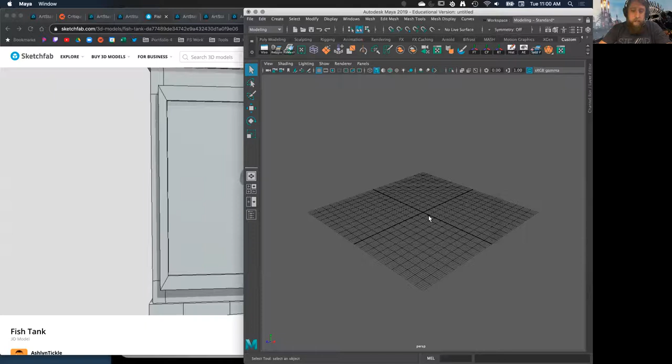You guys can easily make some really cool looking crown molding stuff. Actually, you know what? No, I don't think I have any deformers that do that specifically.

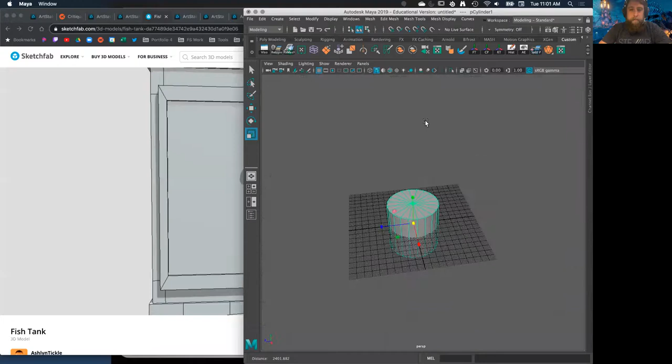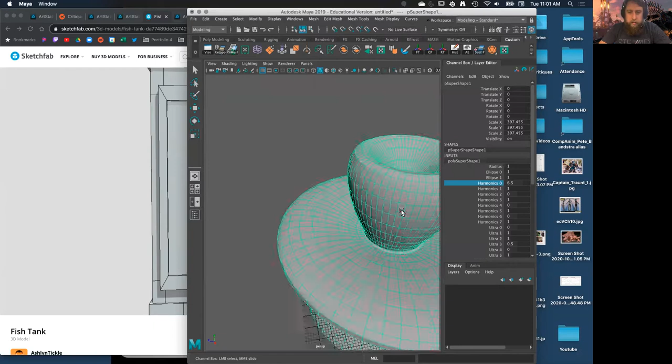Hold on, I wonder if I can make some cool shapes for you guys. I feel like harmonics might be able to do it. If I do harmonics and do some weird stuff here... no, this is too much though, it's too edgy.

Where's my divisions? Here we go. You bring the vertical divisions down. Yeah, sorry, that's just some weird stuff.

If you guys want to know how to do a fountain, then I just showed you how to do it right there.

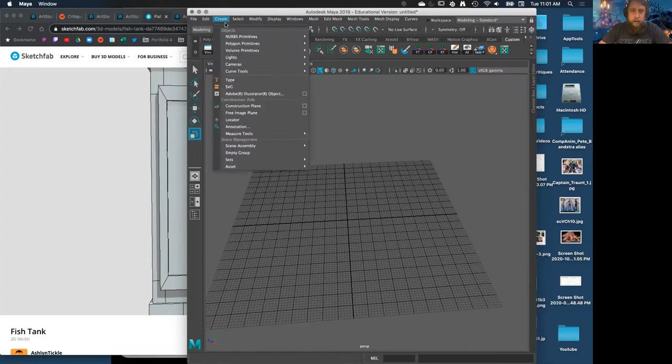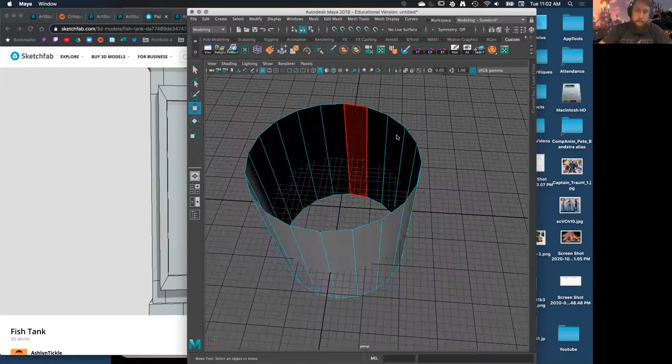But what I was showing earlier here was taking a cylinder, and here's what I want to express to you, is a way that you can do this. I'm gonna detach. I wish that was just an option, just to give me an empty pipe with nothing in it. That would be nice, because I do use curves quite a lot in my modeling, especially when I have some complicated shapes here.

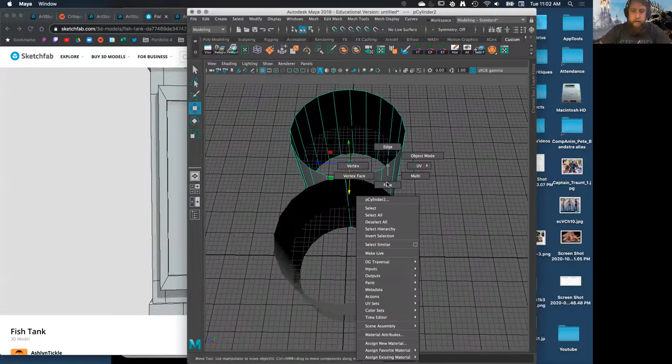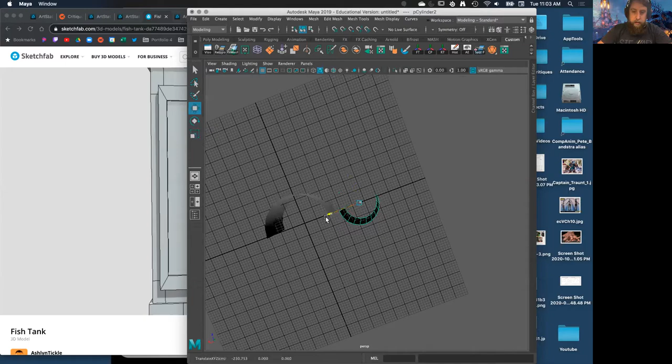But we can take shapes like this and do some curvy stuff here. Maybe you wanted like a nice S shape kind of thing going on here. Maybe this one is lighter, and doing something like that there. Okay, line that shape up.

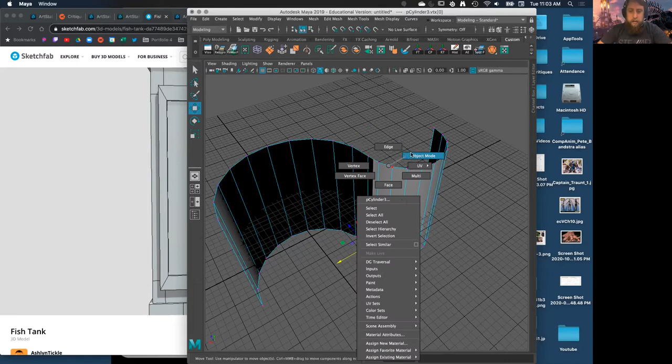I'm just trying to do a simple crown molding for you guys. Hold tight here, I'm gonna combine these shapes together. Let's merge some vertices together, merge it to center. Now the model doesn't know what the heck to do with it, so I'm gonna hit conform. There we go, so that's the edge that I'm using here.

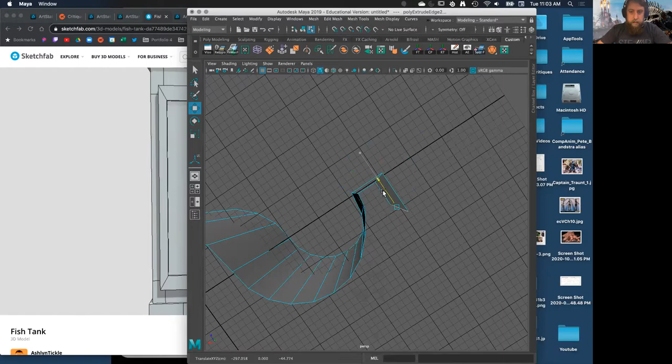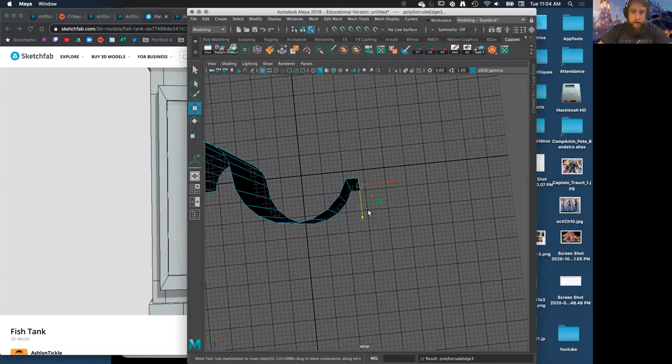I'm gonna take this shape and just kind of extrude it up, and probably extrude it this way, like that. And you know what, maybe I'll take this shape and bring it down like this, and I don't know, do some interesting designs with it. I'll extrude it again, let's get a little bit of a bottom here.

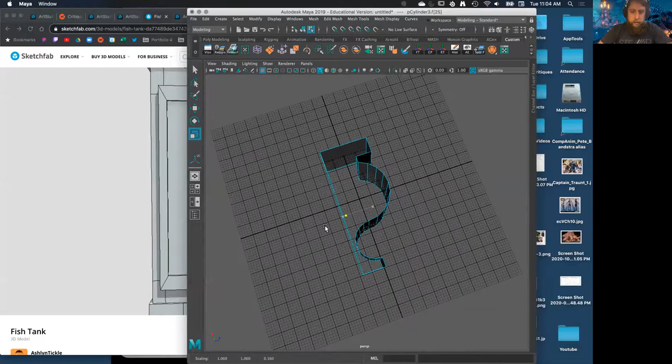If you want to find reference for what exactly you're trying to do here. Okay, so this is the shape that I'm making here. It's a really simple kind of molding shape that I can now extrude this up, and we can get some interesting designs on the side of those doors.

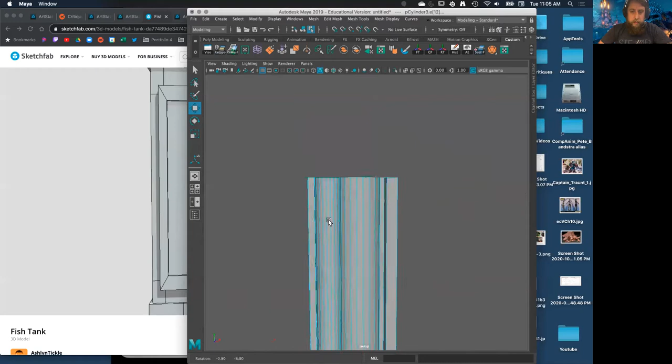Man, I really wish I'd be able to... you know what, here, we're gonna do some 45-degree cuts on this thing too, so that we get actual door shapes. Let me make this thing thinner too, this is actually really huge as well, so hold tight. Okay, scale down, I'm gonna come over here like this. If I want a 45-degree on something, it's hard for me to draw that out by hand.

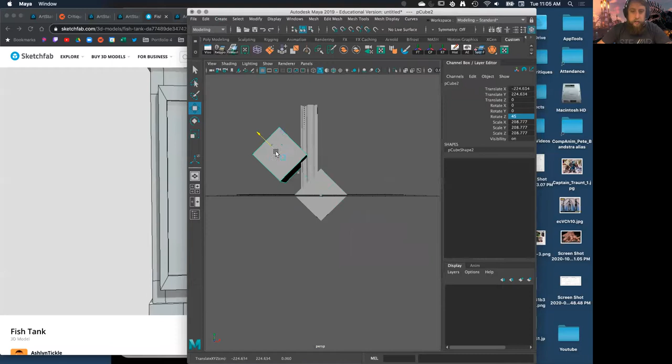So what I'm gonna do here is grab a cube, I'm gonna scale it, and grab the shape here and just make it 45. I'm gonna duplicate one up here like this, and the other one I want doing this right here.

And you might say to yourself, oh Harvey, you're gonna do a Boolean, really, right in a lecture? No, I'm not gonna do a Boolean, I'm gonna do a multi-cut here. Nope, wrong view, there we go, perfect. I'm gonna do a multi-cut on this shape with these other shapes as a reference, that way I could just go point to point.

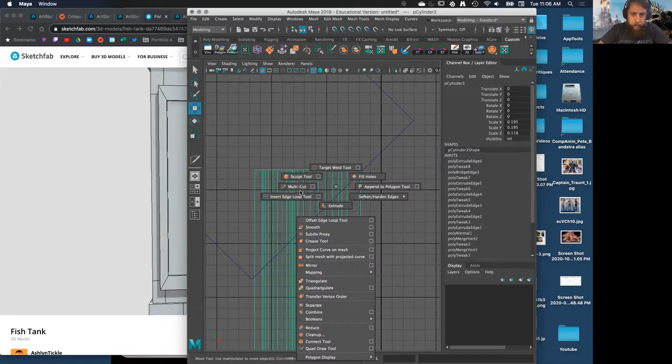Okay, sorry, I'm not in object mode anymore. Object mode, Multi-Cut, point to point. Okay, so it made a line there. You could check it out. Let me just try to hit that vertice head on right there.

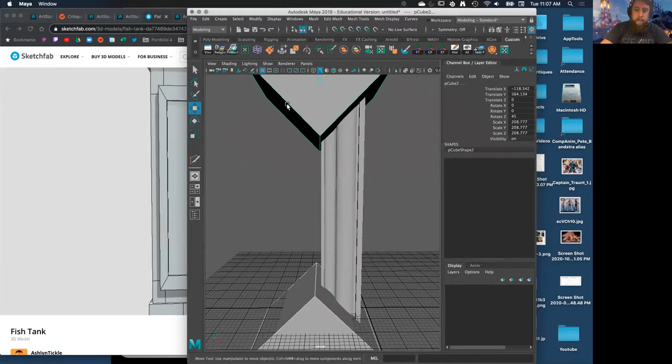All right, so I have some lines here now. Let me just delete these guys, I don't need them anymore. Got some lines here that I can actually detach. This is like a ninja slice tool that you guys can definitely use now.

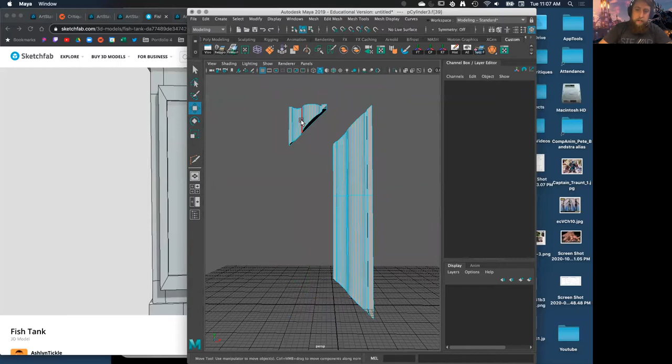Chop those ends off there. I don't know, I mean you can fill this in. You know, this is kind of a messy shape, so I'm just gonna triangulate it. We're really not gonna see this stuff.

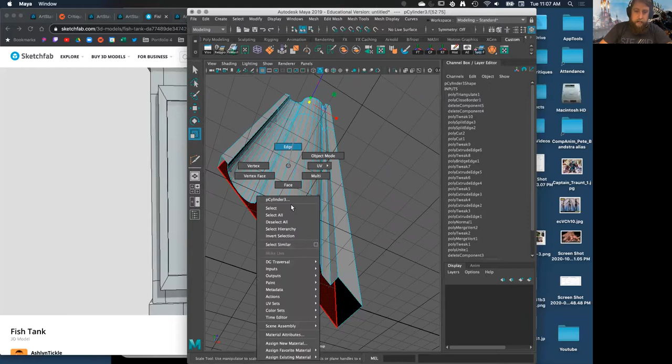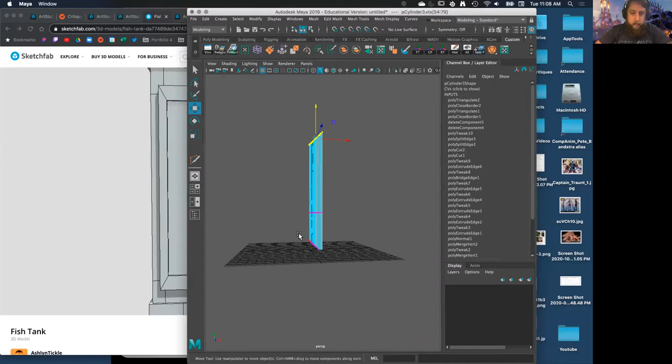But I mean, again, like you've seen me model, I don't like to... I like to make shapes separate so that they can create creases and stuff. So if I was modeling this door now, I would be doing something like this where I would pull these guys out like this, duplicate it. Let me just center the pivot here too.

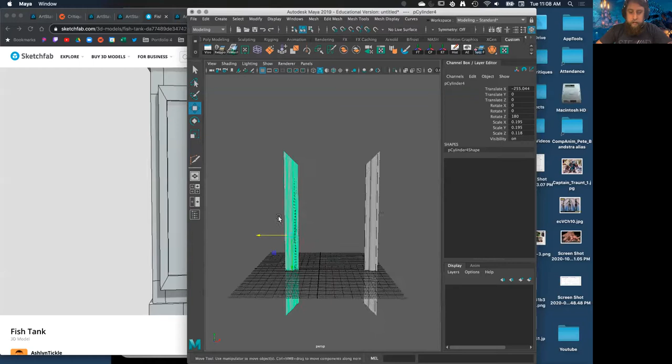We'll flip this guy around 180. Well, think about it. There we go. 180 flip. Okay, and I'm sure you know what I'm gonna do next, right? You know, I just take this guy to a little 90-degree turn here.

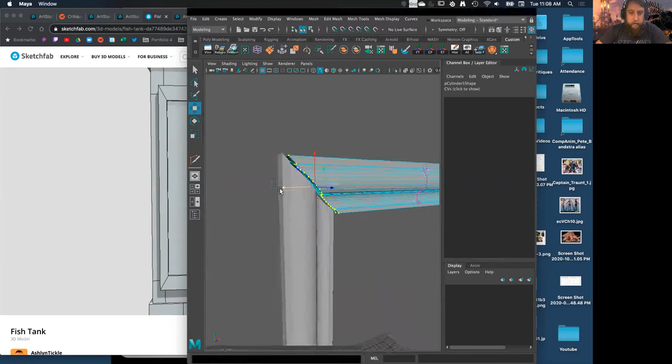Trying to line my stuff up here. Bring it on over, try to get it to line up the best that you can. So now that I'm looking at it, it's just like, okay, well let's raise it up a little bit more and then pull it over here. That's good, we're lined up now. Looking good.

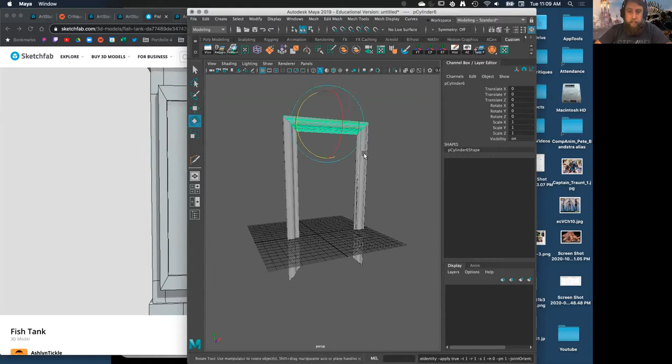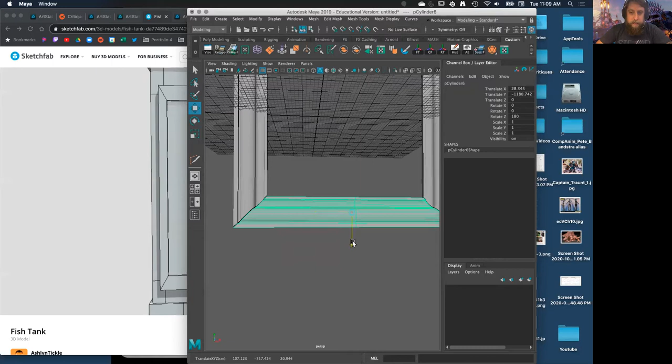Shift duplicate, I'll freeze my transform. Just because there's a lot of transforms going on in this thing, I'm just gonna do a 180 here. Okay, my center is obviously not pivoted still, so my pivot is not centered. Sorry, my center is not pivoted.

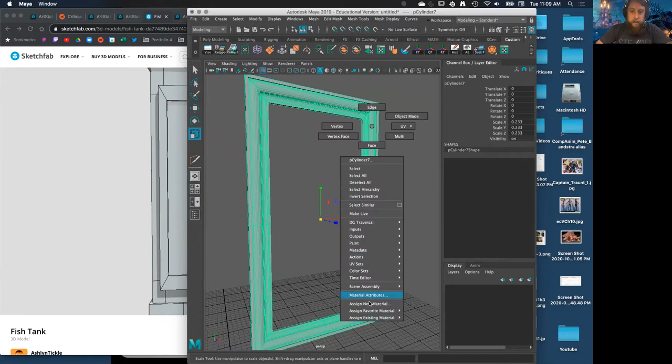All right, and now you got a nice, good-looking crown molding that has some stuff going on with it. Now let me combine this together, and we'll scale this in. We'll delete some history. Let's put a Blinn on this just so we can see it, right? That's all I want from this. I need to soften this stuff out.

No, actually I can't soften because I need some bevels in here. This stuff's not going to soften very well. Here, actually, let me just grab some edges in the middle without grabbing these end piece edges, and I'll soften that out. Okay, but here's the look there. All right.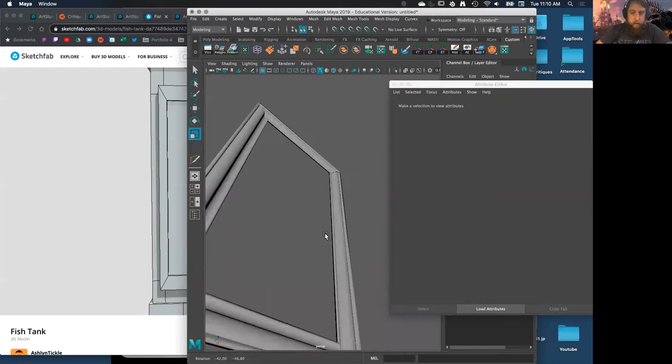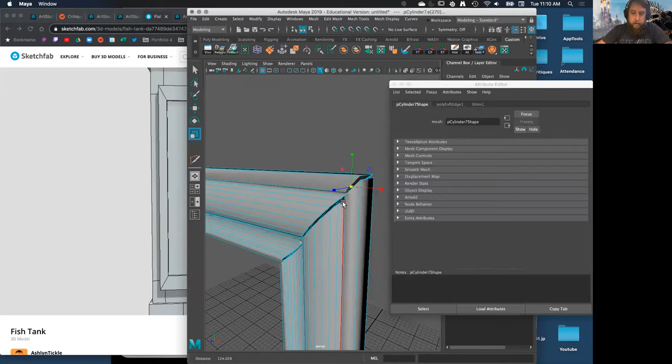Much nicer, you know, it has some appeal to it. That's the way I want you guys thinking about shapes. Try to brainstorm and figure out how am I going to make this stuff look good, how am I going to make these creases really look good. You definitely want some bevels on these guys probably. I need to do that before I triangulate it, because now there's all those triangles there keeping me from grabbing a whole edge loop. But yeah, that's the kind of stuff you want to be pushing for.

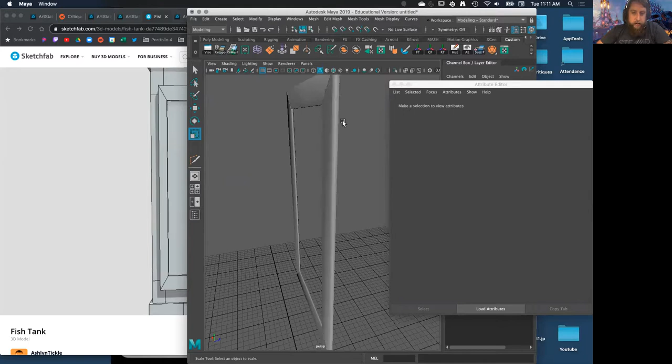And then the inside of this just has to be a plane. You guys can just put a plane in there. Easy. If you want this guy to be flat, I mean, you could definitely.

I can duplicate this guy. You know, maybe I want like a flat piece in the middle or something, I don't know. You can always reuse that geometry that I had there at the beginning.

Just delete everything else. I left this edge loop in the middle here. Here, let me just insert another edge loop here. Whoa, what kind of n-gon's happening over here? No me gusta.

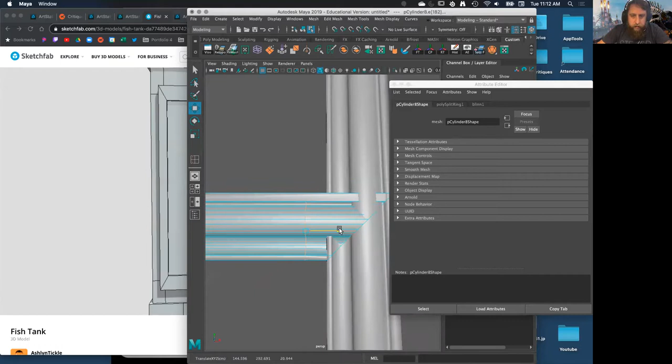Anyways, take this edge loop over here now that we're working with it. What's going on? All right, take this edge loop over here. Take this one over here, and then you could delete those corners off. Now this one, I can't delete that up there, but there, I mean, that's a little sill for you too.